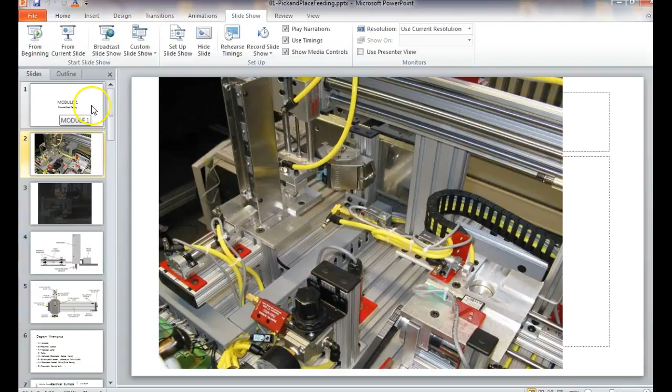So the module we'll look at in the class is the pick and place station. And this is module 1. And the video is not going to play.

A recorded lecture? Yeah, correct. Okay.

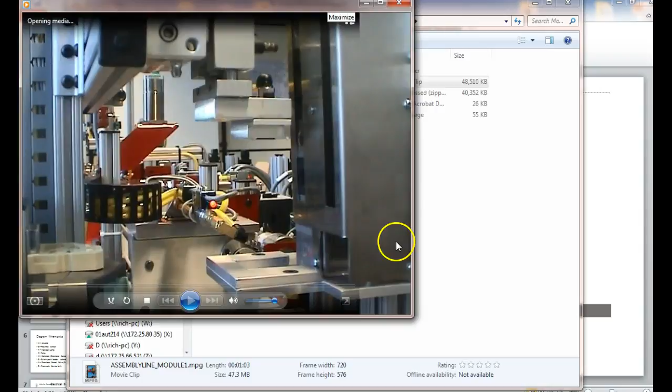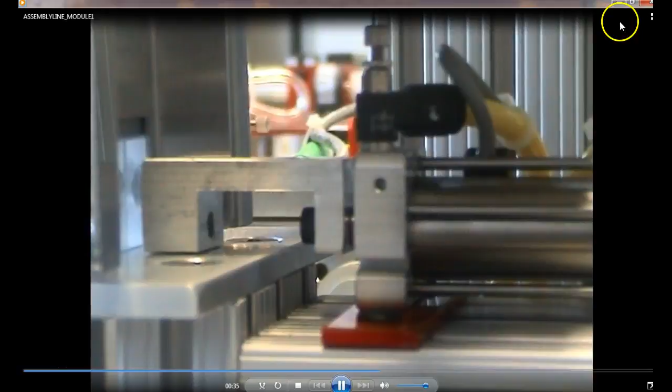So this is a video of the module if it runs. So notice what happens is it comes up to the place robot, moves over, and then sets it down on the carrier. It's a pretty simple process. So it's all taking place. The valve is kind of rotating.

Oh, you mean this guy right here? No, don't rotate around. No, it picks it up, picks it straight up. Then, of course, it traverses. Of course, I don't mean it does. It's just that I don't remember it doing that. Assembly line, module 1. Now, ours is a little different than theirs. Yeah, it didn't rotate. They're just looking at it from a different angle. It didn't rotate. It moved.

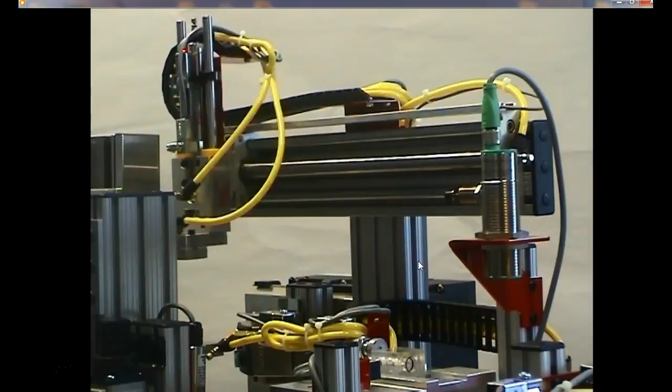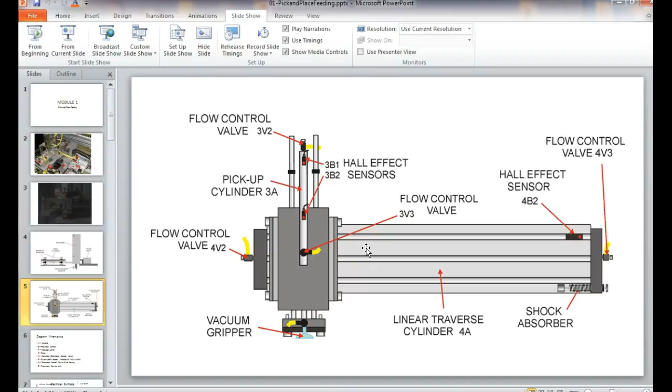I don't know if those are videos up there or not. Well, I wouldn't put them up there now because another thing I realized about putting the videos up there is that it takes forever to copy the course over. It took all night to copy the course over, so that's another reason I went with the links. So I'd have to upload those to YouTube, and I don't know if we got the rights to do that.

So what's the sequence? How does this thing work? Yeah, on the hopper or the magazine or whatever you want to call it, the bottom indicates there's a block present. And then what are we waiting on? Oh, yeah. No, it's waiting on something else now. It's waiting on what button on the front? So let's go over a table that shows us the sequences that we go through, right?

So here's the vacuum. They don't show us our pressure sensor, flow control valve, but the ones on here, there's 3B1 and 3B2, and it says these are Hall effect. And some of these are wrong, by the way. This is not a Hall effect. This is a reed switch. So when they documented this, they got some of the things wrong. And they don't show the Hall effect on this side. What's the Hall effect on that side? We'll look at that in a minute.

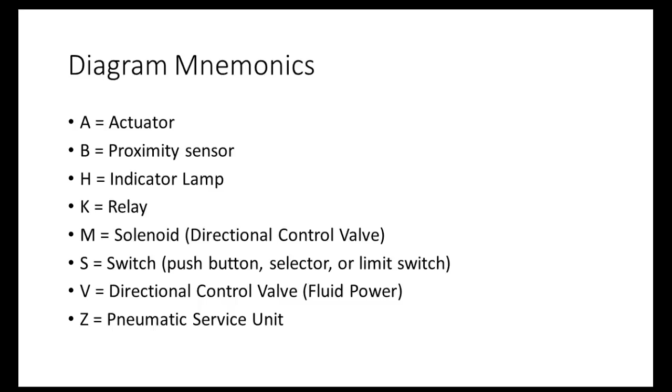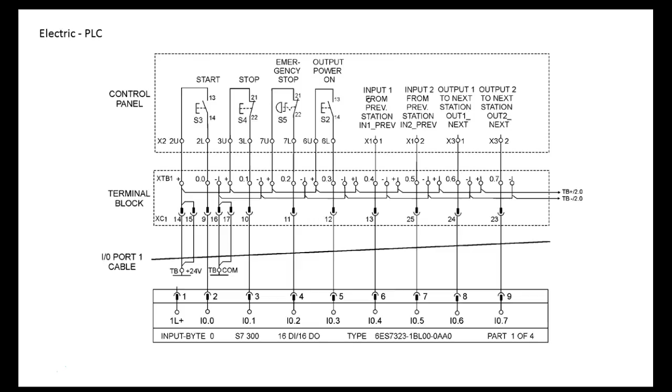So we went over those. Are we okay here? We went over the electrical symbols. Are we okay there? Anybody got any questions here? Okay, went over that last class, right? Talked about the PLC inputs. Everybody okay here? Then I think we looked at the pneumatics. These are the terminal blocks, by the way. We don't need to look at those right now. This is probably a little better. This tells us all the sensors, but it doesn't show us their location. So that first picture shows us our locations.

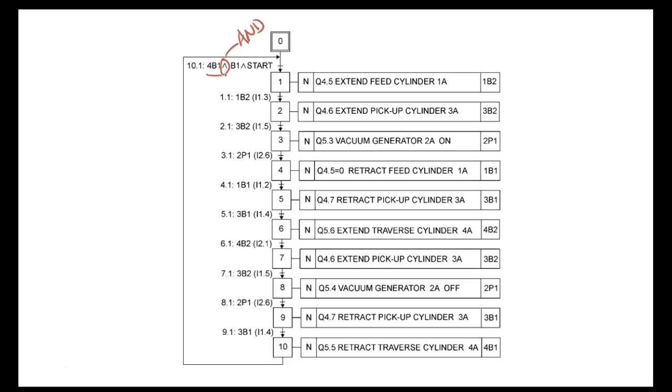Here's the pneumatic symbols, and this is what we want to look at right here. This is called a function chart. So at the front, up at the top, by the way, the little up caret right there. Let's see what I'm talking about. All right, here. This is a logic AND. So what it means is all three of these conditions have to be true before we do anything. So this says 4B1 has to be true. B1 has to be true. So we're not sure about 4B1, so we need to find out where that guy's at.

So 4B1 has to be true, and B1, which is the part sensor, and I have to do what? I have to press the start button. Okay, so if that's true and I press the start button, then what's going to happen? Cylinder 1A is going to extend, and that's the output on our PLC. And when it extended, what is going to occur? It's going to change 1B2.

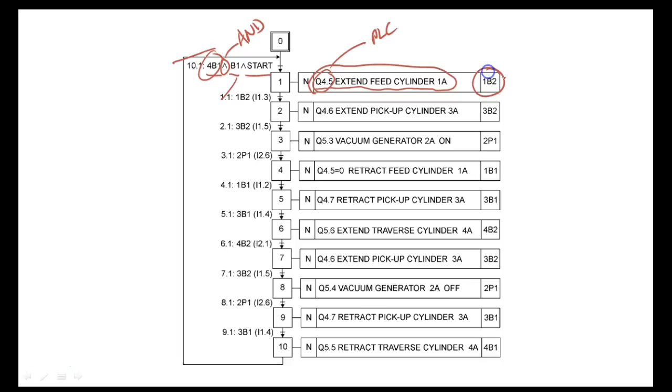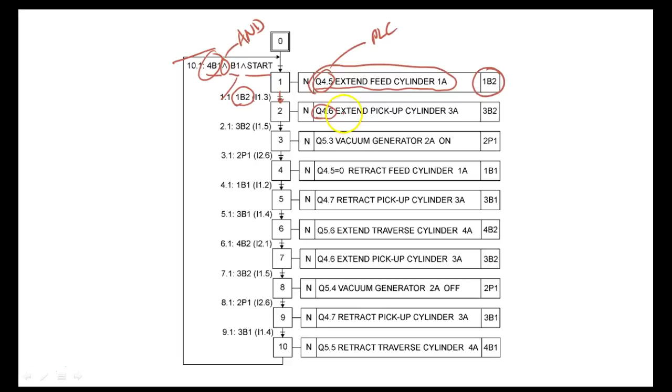Now, what's going to be required by my next step? So to go to this next step, it's looking for what? 1B2 to be true. Now, if 1B2 is true, then Q4.6 output of the PLC is going to go true, which should do what? Extend the pickup cylinder, which is going to cause what? 3B2 to go true.

Now, if 3B2 is true, see, so this is what sensor this is going to affect. This is what's required to go to the next step. That makes sense. So here, if 3B2 is true, then what's it going to do? It's going to turn on the what? The vacuum generator is going to turn on, which is going to cause my pressure switch 2P1 to do what? Become true.

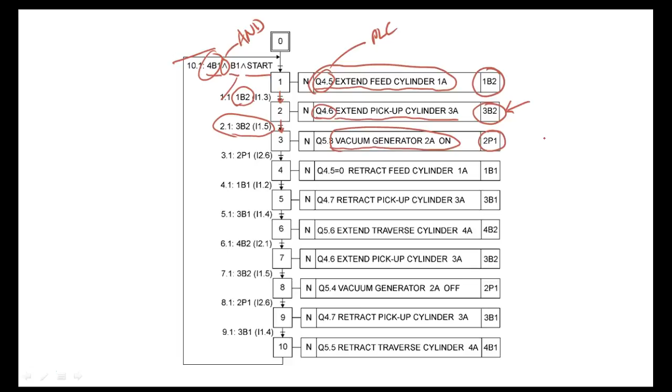What's that? This is called a function chart. Now, some people might have a quite different name, but that's what we'll refer to it, the function chart. And this is what y'all are going to try to develop tonight for your section of the line, for your module.

Now, if the pressure switch says we've got a vacuum because the pressure switch goes true, then what's the next thing it's going to do? It's going to retract that feed cylinder, right? Which is going to cause what? 1B1 to go true. Now, if 1B1 is true down here, that's going to do what? Retract the pickup cylinder. That's the guy, and it's going to retract it, right?

Which is going to affect what? 3B1, which is at the top of that cylinder, right? Y'all follow me so far? Okay. If that's true, then what's it going to do? It's going to extend the traverse cylinder, which is actuator four, and it's going to affect what? 4B2. If 4B2 is okay, then it's going to extend the pickup cylinder again, which is going to move the block down, right? And it's going to affect that sensor right there.

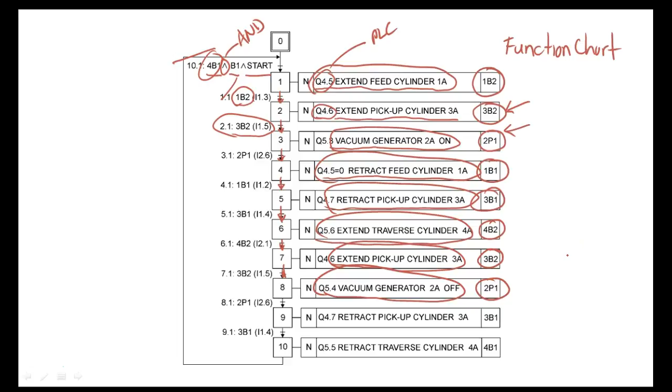If 3B2 is true, then the vacuum generator is going to turn off, and it's going to look to see if 2P1 is turned off. Right? You understand? Here, if 2P1 is turned off, then what's it going to do? It's going to retract the pickup cylinder. It's going to affect 3B1. If 3B1 is true, it's going to do what?

It's going to retract the traverse cylinder, which is going to go back, and there's where 4B1 comes through. So 4B1 says the traverse, so we looked at it, but we just didn't call it that number, right? You understand? So 4B1, and then what do we do? We're ready to do the whole thing again, right? You understand? And this is called a function chart.

Yeah, it's simple when somebody does it, but it's up to you to figure out how your section works, right? Y'all understand that? And of course, you need to understand what sensors. So you need to see, okay, what sensors are true and what sensors are false. And then we'll figure out which way to go with this, right? You might be right or you might be wrong. It doesn't hurt to be wrong. It's great if you're right. It'll give you a feel of setting up vacuum, setting up function charts.

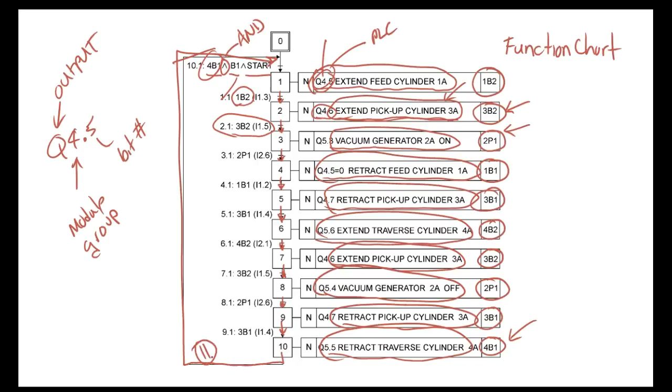Now the next chart that's available is what we call a step chart. So a step chart, notice we got how many steps? We got 11 steps, right? Oh, I'm sorry. 0 through 10. Well, 0 is the start position, which will be what they're calling 1.

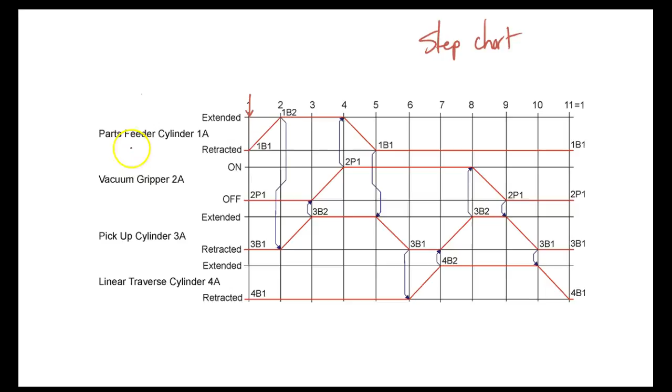So what we do here is we put our different actuators. So on this guy, we got 4 actuators, right? So they're off on the left. And then what can we do with those actuators? Well, our cylinders, we can extend or retract. The vacuum, we're going to turn it on or off. So to start it, what does it say we need? Now up here, these are the steps.

So first of all, before you set up your chart, you need to count the number of steps. And then over here on each cylinder, you need to put down what position these sensors are in. So what do we need to start it? 1B1 has to be true. 2P1 has to be off, right? 3B1 has to be retracted. And then 4A, which should be 4B1, has to be retracted. So that's how it starts.

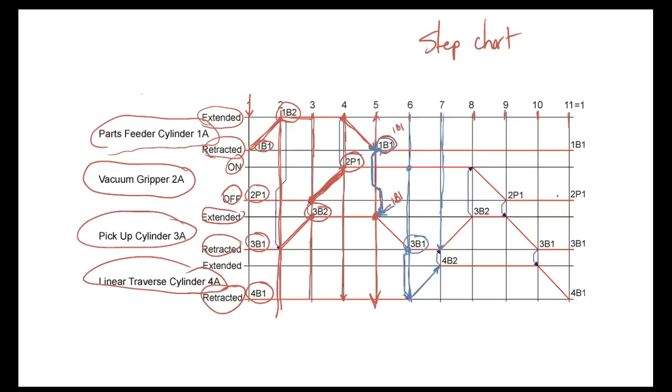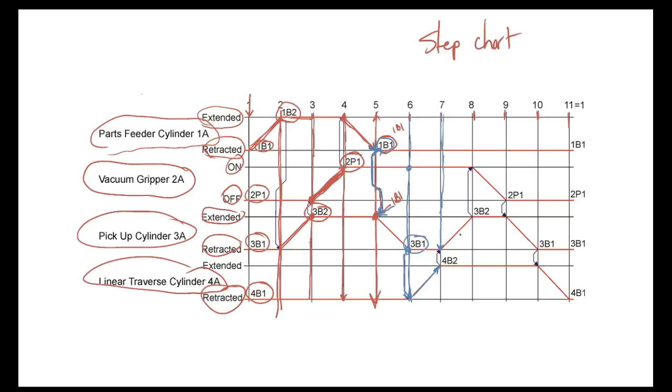Or if it was in automatic mode, it would cause it to extend. But when we have it on manual mode, between every one of these, we're doing what? Pressing the start, right? So we don't put the start button on these. So this step chart is not set up for manual mode. It's set up for what? Auto. Everybody understand? So since 3B1 was set, it causes the traverse cylinder to extend. Okay. And then we come up here and do what?

Then 4B2 affects this. So what happens here? Well, when this extended, then that's through with step 7. This is going to cause 4B2 to go true. Step 8, what happens? 1A stays what? Retracted. The vacuum gripper stays what? On, right? 3B, this stays extended right now. This is going to change.

So what happened is your pickup cylinder did what? It extended, right? Everybody okay? Which triggered what? 3B2, which is going to trigger step 9, right? You understand that? Go ahead, Barry.

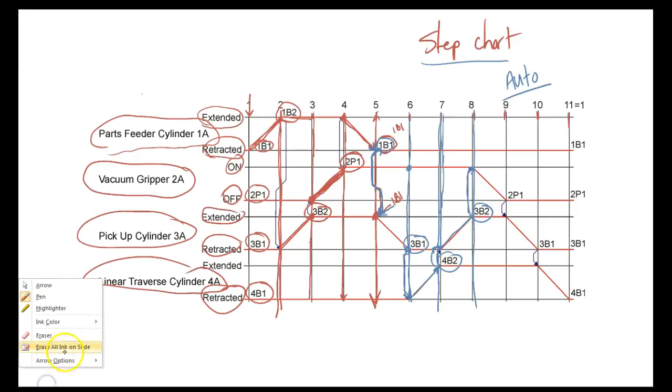Okay, so we're looking at step 7. What happened during step 7? Well, 4B2 is a sensor. So sensors don't retract or extend. Sensors indicate it happened. So what happened in step 7 is that cylinder 4A extended, which caused 4B2 to go true. Okay. Right, you understand? Now we're through with step 7. Now we're ready to move what? To step 8.

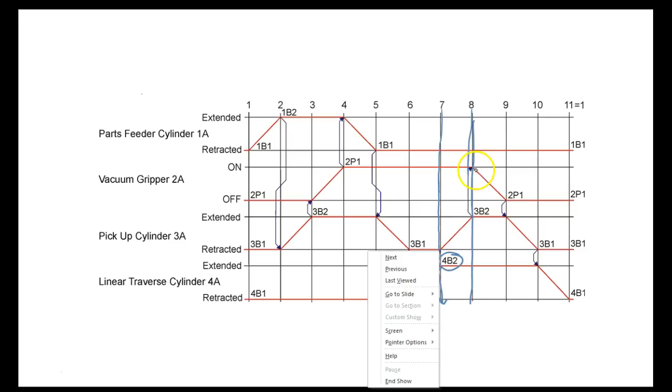Now when 4B2 became true, what happened to get to step 8? There's only one thing. If we follow this down, what happens in step 8? Part cylinder stays what? It's still retracted. The vacuum is still on, right? You understand that. But this changed. So 3A did what? 3A extended, which triggered 3B2. But that's all that happened in this step. Okay. Now, what this arrow is showing you is what effects triggering 3B2 has, right? You understand? So we move to this step right here.

Now, what happens in this step? Well, the part cylinder is still what? Retracted. So what happened between step 8 and step 9? Well, the vacuum grip turned off, which causes 2P1 to turn off, really, right? You understand? 2P1, which is going to affect this guy right here. And then what else happens? Well, that's all that happens in step 9. Well, what happens in step 10? Pickup cylinder retracts, which triggers what? 3B1.

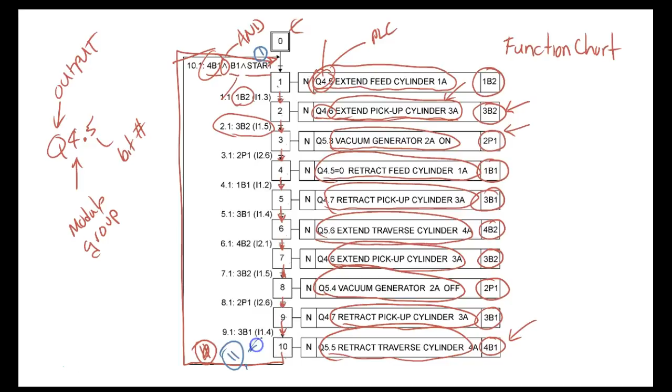So basically on the function chart, here's 1. And down here is what? Is 11. Right? And then this would be 2 on the step chart, 3, 4, 5, 6, 7, 8, 9. Yeah. No, 1's okay. This is 1. This 0 right here really means nothing. So this is actually 1. It's just down here on 11.

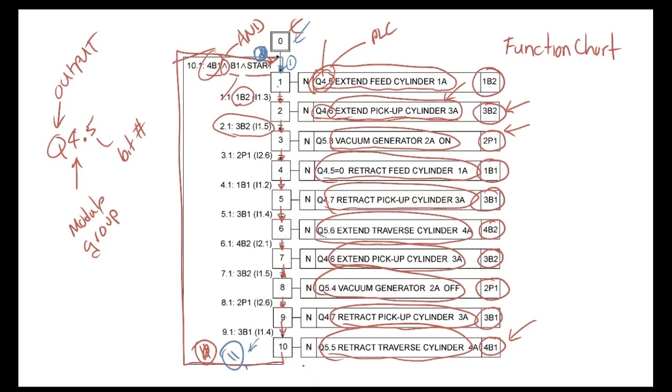What is 11? Well, 11 is this guy right here, which sets us up to go back to what? The start. So I think that's what they're saying. 11 equals what? 1. So on the function chart, they just don't give this step a number. But 11 and 1 are the same, right? So what we need to make sure on the step chart is that this last step is always going to be what? The first step. Because that's when the automated machine has made its cycle. Right.

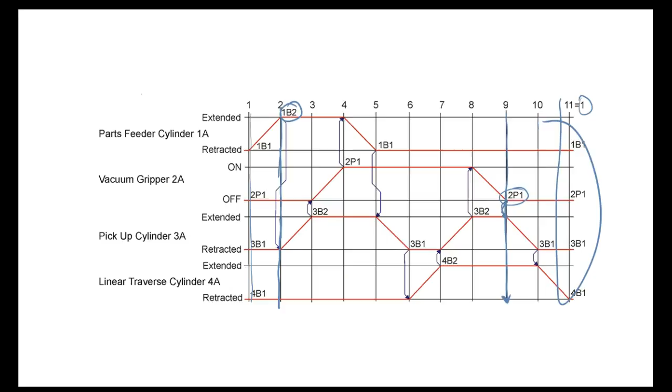So what we do here is we basically go over there and say, okay, what sensors are true? Now, the one that we missed out on was this guy right here. What's the initial start position? Well, the traverse cylinder has to be retracted or on the left, right? What else had to be true? Part sensor had to be there, which was B1. What else? The parts feeder cylinder had to be retracted, which was, I believe, 1B1.

And then the pressure was what? Off. Now, of course, on the function chart, they don't even show the pressure off. Whether that's true or not, I don't know if it monitors that sensor. We would have to look at the PLC program itself, but we know for a fact that nothing happens if the pressure's off. But I think that was probably because of this right here. 1B2 would never go true. If 1B2 never went true, then nothing else happened, right?

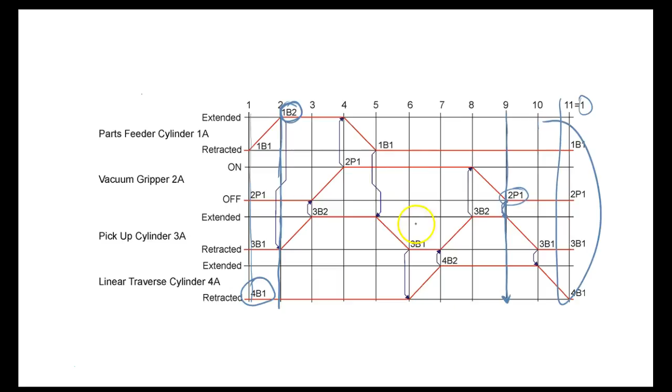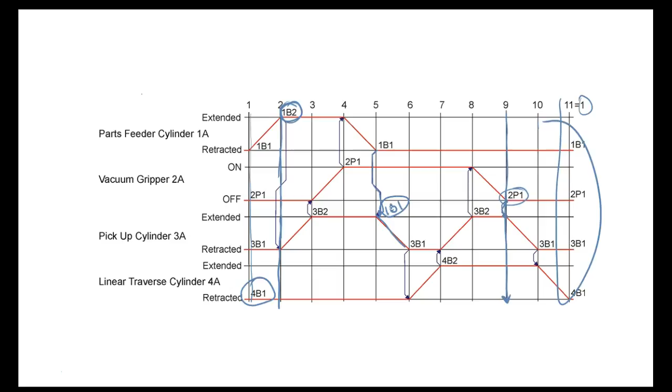Well, they could, and I've seen some people come down here and do that. They'll just put 1B1 down there too. You could do that because what caused this right here to move was 1B1. Now, what Siemens did when they did the step charts, I don't think it was even Siemens, I think Amatrol did this. When they did the step charts, they decided to only put the sensor that triggers an event where it is triggered, and then what it triggers, they use those lines.

So you could do like this if you wanted to. All we're trying to do is figure out, or you can do what I just did. So what I just did is I just came down here and put 1B1 right there. It makes sense. Well, yeah, but you don't want to get confused about this triggering 1B1, because this isn't what triggered 1B1. This right here is what triggered it.

So probably the best method, those squiggly lines are okay, but you could also just do what, James? You could just come down here and just put it in there. All you're trying to say is, okay, 1B1 went true because what? 1B1 went true because this part cylinder was retracted. And then we would need to say, okay, what effect did 1B1 going true have? Well, 1B1 caused the pickup cylinder to do what? To retract. Understand? Yes or no?

So the way they're doing it, they're saying, okay, what caused the sensor to go true? Well, what caused the sensor to go true was 1A did what? Retracted. Well, what effect did 1B1 have? Well, 1B1 affected this right here. So 1B1 did not trigger the sensor. This did not trigger the sensor, but this uses the sensor to decide to retract. So the little squiggly lines are okay, but if you just want to draw arrows, that's fine. You know what I'm saying? Yes or no?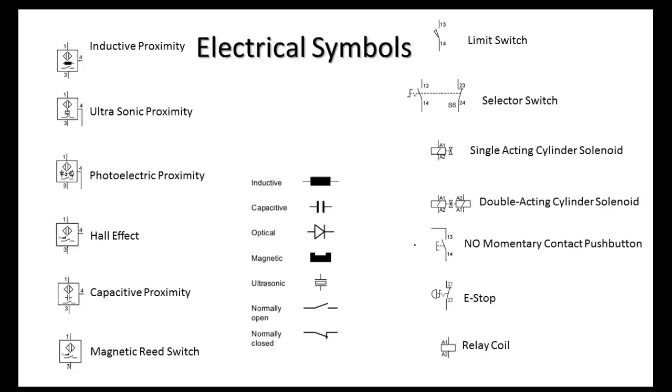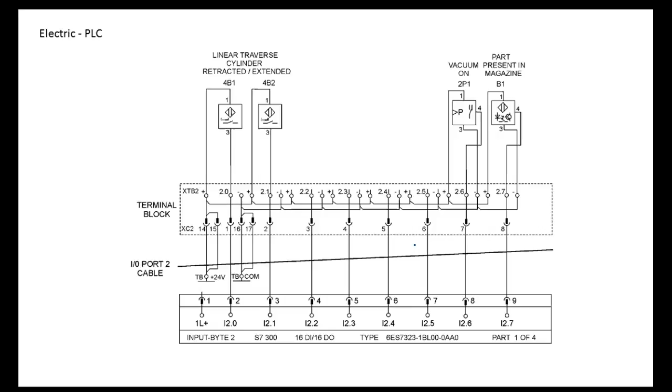Well, what you're going to do is go over there and look at all your sensors, right? So what I'll probably do is run them off and give you this right here, which shows you the sensors, and that way you know what sensors to look for, right? And then you'll determine if they're true or false. And how do we know if they're true or false? Yeah, there's an indicator lamp on all our sensors over there that indicates when they're true or false. So before you start, you'll go out there and say, okay, this sensor's true, this is true, this is true. Right? So the first thing you've got to do is figure out what actuators are on your module.

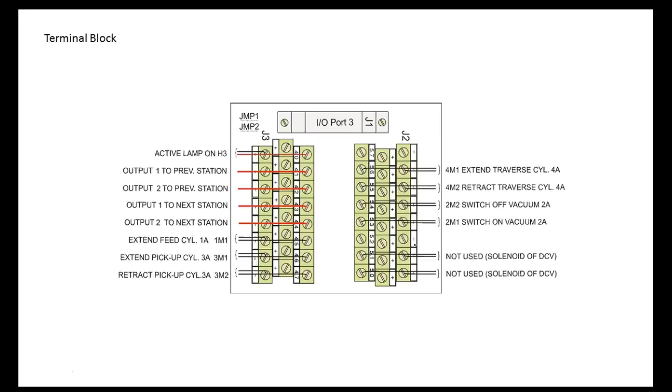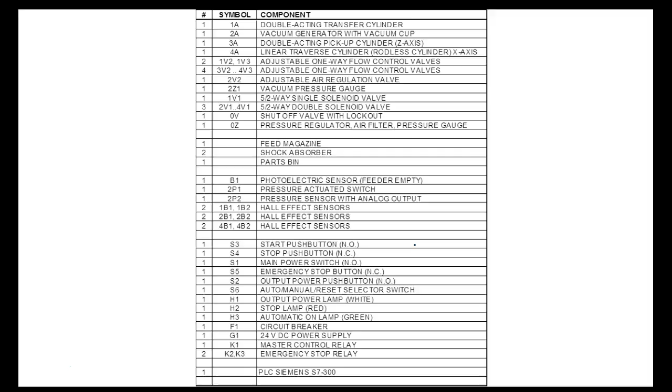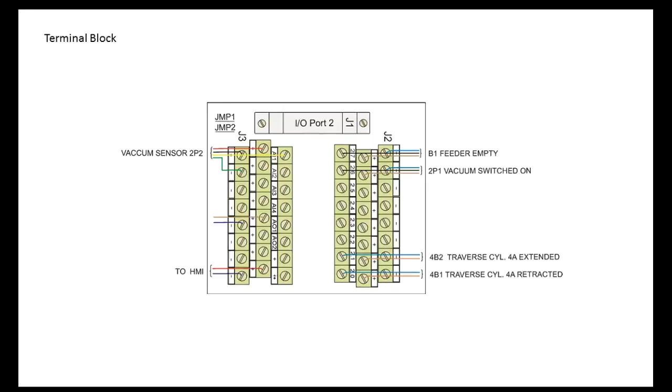Go ahead, Corey. What does P stand for? That's a pressure switch. There is one sensor missing on this, and that's the traverse retracted. Feed cylinder, pickup cylinder, vacuum on. So the traverse retracted is 4B1. So 4B1, you don't show that, right? Because 4B1 is right in here.

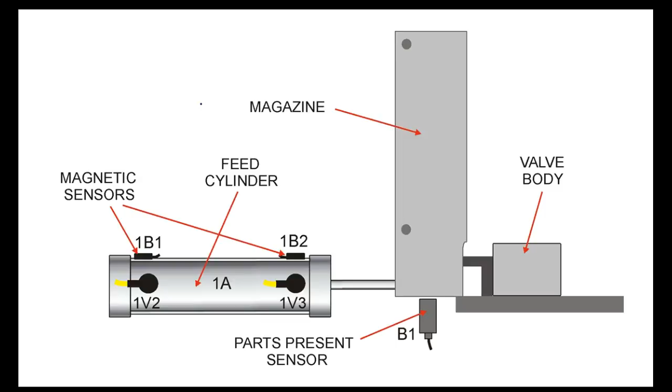Of course, y'all are not going to do this section right here. So I'll print off these, which show you the location of the actuators and also the sensors. Not the actual location, but what the sensors are called. Anything else? Yes or no? Questions?

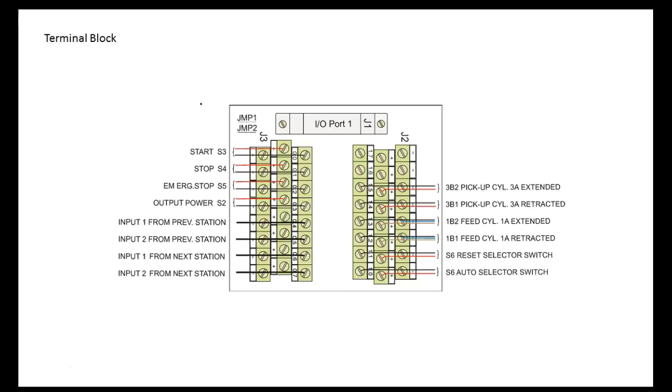Keep those out, Thomas.